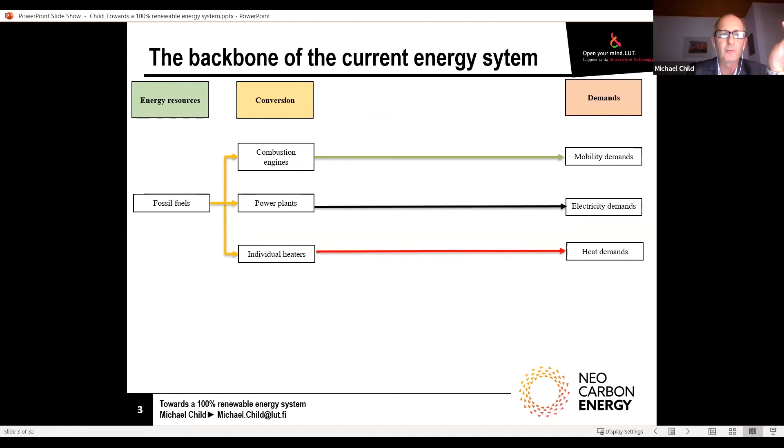So let's make that first change in our system. We can use biomass-based fuels for all of these things, and we don't need to really change the system very much, because biomass can be converted to liquid fuels to replace oil, solid fuels to replace coal, and gaseous fuels that can replace natural gas. In many of these cases, conversion technologies like power plants and cars don't need to be changed at all.

However, there are two main problems associated with the extensive use of biomass. The first is that we can't store biomass the same way that we can store fossil fuels. We can't really store them for long periods of time without them either getting rotten or becoming lower in quality. And second, and I think this is the most important thing, there's simply not enough biomass in the world that can be used sustainably to cover all of our energy demand. We'll see a little picture of that a little bit later.

So we definitely have to look at some of these other options so that we can reduce the pressure on biomass. But what are all of these other options? This is what I hope to do, to go through them step by step.

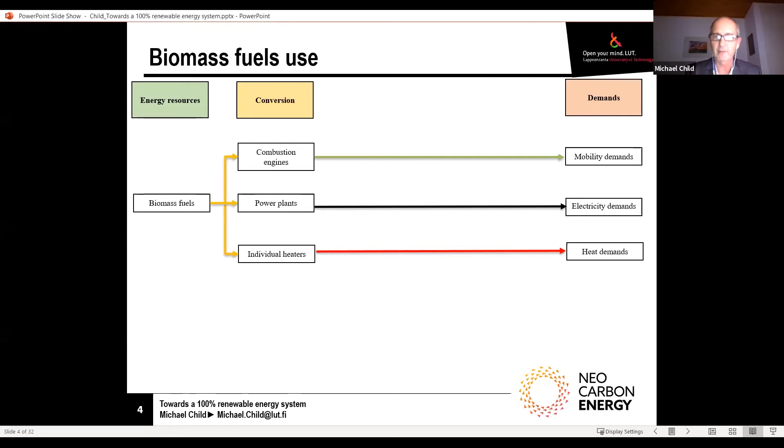So I think the first option that we need to look at is not the energy resources or the conversion technologies, but the demands for energy that we have. We need to change how we demand energy services. We need to reduce the amount of energy we use. We need to be more efficient with our demands. And important in the future, and very important to your lives, will be to add more flexibility of our demands.

So now I'm going to ask you another series of questions that I hope you'll answer. What are some of the ways, first of all, that we can reduce the amount of energy that we use, either for mobility or transport, for our electricity demands or our heat demands? How can we reduce the amount of energy we use?

AV, can you just open your microphone and say your name? Sorry, AV? She's my sister, Assunta Viola. Assunta, my name is Assunta Viola.

Okay, Assunta, so what you said on the chat box? I said using natural resources like sunlight.

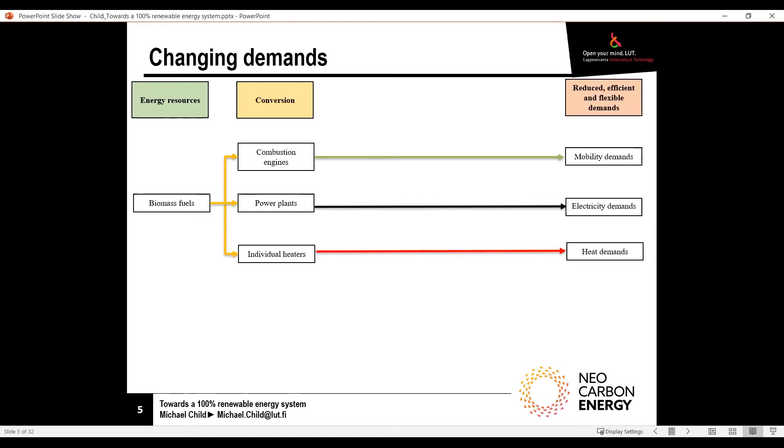This is key: we start to realize that more of our energy intensive activities can be timed in a smart way. We do this for a lot of activities in our lives — we choose clothing appropriate for the conditions outside, we choose to do certain activities or not because of the weather. We're just going to expand that into many more energy-using activities, doing certain activities when the sun is shining, the wind is blowing, or it's raining, so we know there's hydroelectricity around, and then we can avoid or put off other activities for other times.

We've gotten very used to getting what we want when we want it in terms of energy services. But I think as we move towards more variable renewable energy, like from the sun and wind, we need to think about how our demands can be more flexible. I don't think that really gets enough attention — we focus more on energy resources, but I think this will be a very big topic for the future.

All right, so now let's look at some conversion technologies, specifically power plants and individual heaters. Power plants are generally what are called condensing power plants. They make electricity: we put a fuel in, we make hot water, it's turned to steam, and that steam drives a turbine that makes electricity. But what happens to that steam after it goes through the turbine? For the most part, it just gets condensed or cooled in a cooling tower and goes off harmlessly to the atmosphere. The energy efficiency of condensing power plants is roughly 30 to 38%.

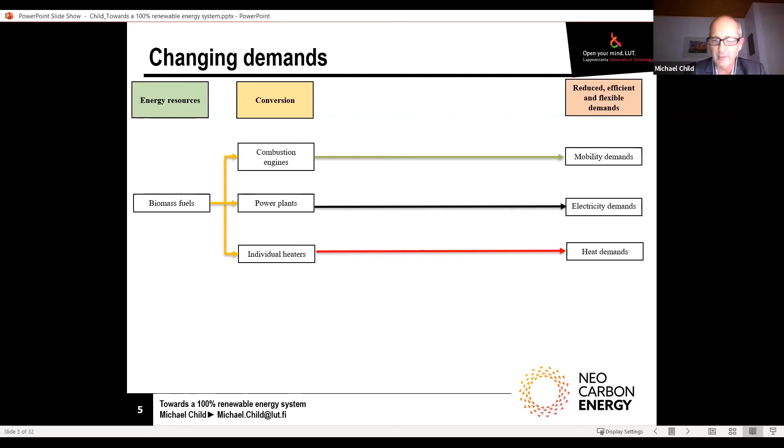But here in the Nordic countries, we utilize something called combined heat and power plants. We make electricity at roughly 40% efficiency because of the type of plant that we use, and at the same time we make heat. We utilize this heat in district heating systems that heat our homes, businesses, shopping malls, hospitals and so on at about 50% efficiency. So the combined energy efficiency of a combined heat and power plant is about 90%, far more than just the individual plants we had before.

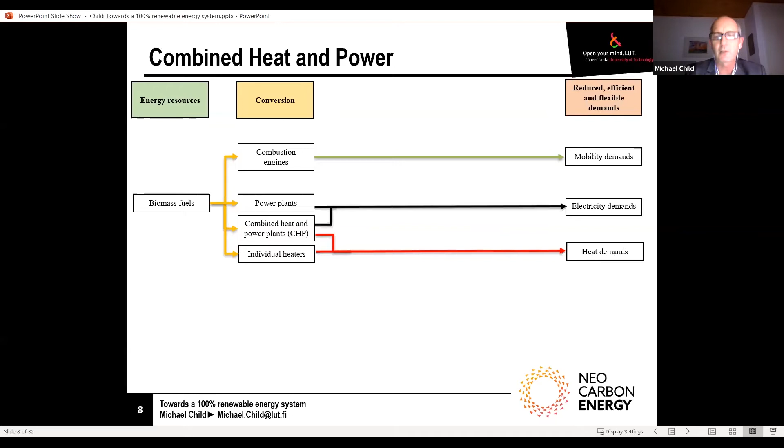And this will ease some of the pressure that we have on the biomass resource. Another good thing about district heating systems is that we can utilize a whole bunch of different types of heat. One thing district heating systems commonly have is some kind of storage, and this type of storage tends to be very cheap. We can make significant amounts of storage in caves, underground pits, tanks, and so on, and again it adds some aspect of flexibility.

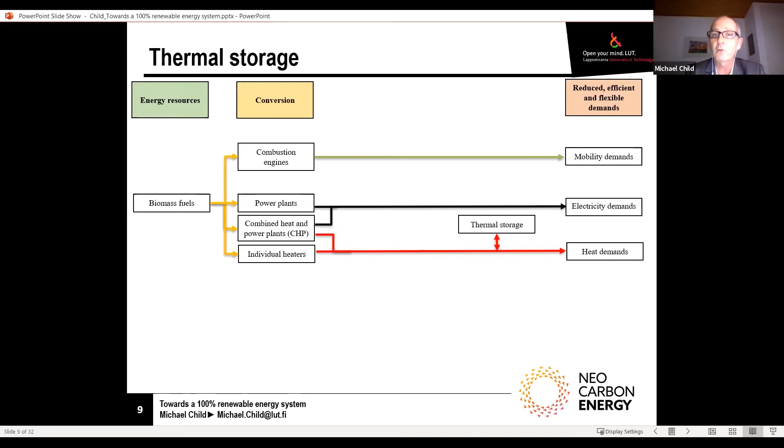We can even be flexible over a longer term, such as a seasonal scale. So we can make heat in the summertime when it's hot, and even save it until the wintertime when the temperatures are colder. Then we can look at other forms of heat that would fit naturally into a district heating network. This includes solar heat that we've already talked about - it can be used in a district heating network, or in an individual home for hot water - but also waste heat from a number of industries that use steam or hot water in their processes. This waste heat can easily be recovered and used in the district heating system.

All right, so we have a new element here to the system, but we need to add more. I asked you earlier about what other types of energy resources we have access to, and I'll just show you a simple graphic of what they all are.

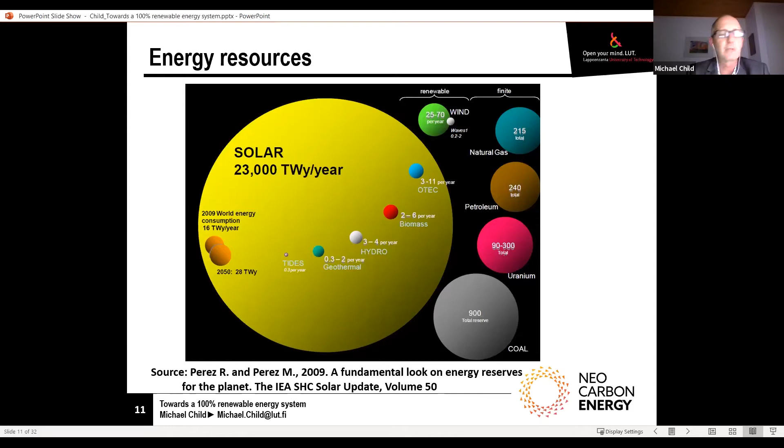As you can see, the total use of biomass as a resource is less than half of the current demand for energy, and it's expected to only be about 20% of total energy consumption in the world in 2050 at best. So we need to go back and look at other energy resources that we can use so that we don't cut all of our forests down and only use biomass sustainably.

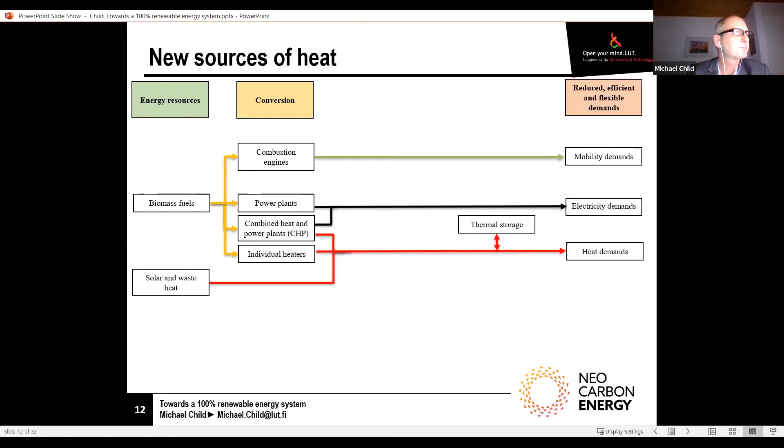So we need to use a wider range of sustainable and renewable fuels, and we've mentioned some of these already. You can add sugarcane to this, other crop residues - all of these are sort of biomass, but we can think of it a little bit differently. And we can also start to think about other sources of electricity, which have also been mentioned as well.

I've already mentioned that thermal storage can offer some kind of flexibility, even up to a seasonal time scale. And we have seen how combined heat and power plants and district heating can bring together the electricity and heat sectors. In the traditional energy system, these sectors—mobility, electricity, and heat—tend to be looked at in isolation, but now we can look at them in an integrated way. Further integration can come from heat pumps.

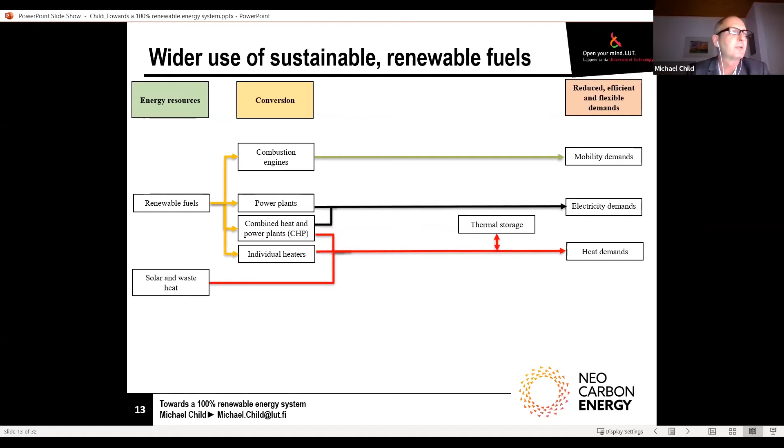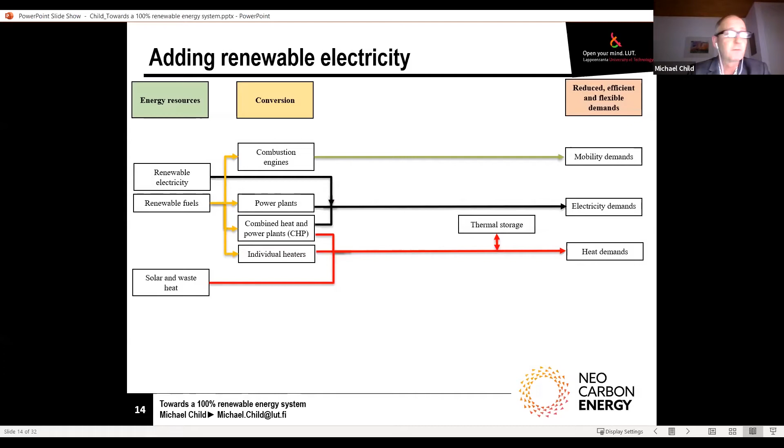Instead of using just individual heaters, we can start to use heat pumps and other sources of waste heat, such as geothermal heat, solar heat, and waste heat already. In my own home, I have a geothermal heat pump that basically converts 1 unit of electricity into up to 5 or 6 units of heat, depending on the outside temperature. This is another way I've been able to be much more efficient in my demands for energy. I still get the same amount of heat, but the overall primary energy I'm using is much lower.

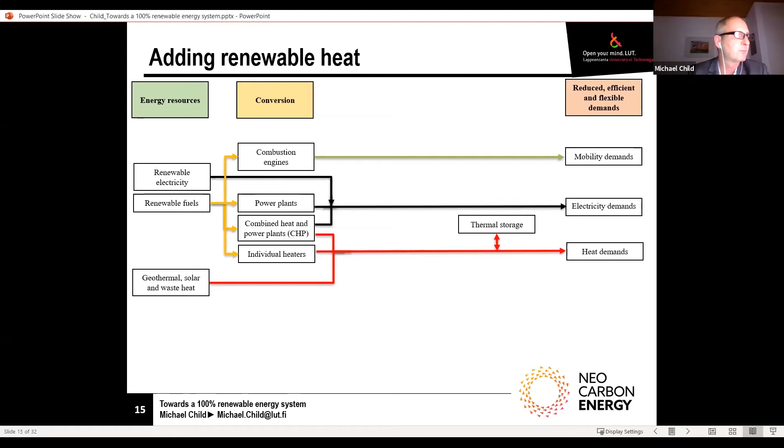As mentioned, we can also get power and energy storage from hydropower or hydroelectric power plants. The amount of storage depends on the type of river or water system where we find the hydropower plant. Some of the rivers here in Finland, for example, are quite small, so the amount of storage behind the dam is very limited. But I'm sure in Brazil there are much larger hydroelectric projects that can offer much more flexibility to the energy system.

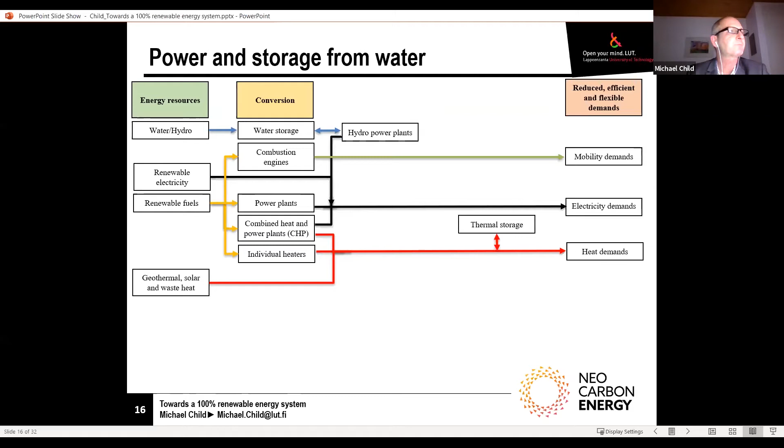What happens when the sun doesn't shine, the wind doesn't blow, and we don't get enough power from hydro, and our renewable resources or renewable fuels such as biomass are used to their maximum? Well, luckily, we can borrow from our neighbors if they have any. And at times when we have extra energy, perhaps we can sell that to our neighbors as well. So wisely using import and export is yet another aspect of flexibility that we already use in our energy system, and we can use even more in the future.

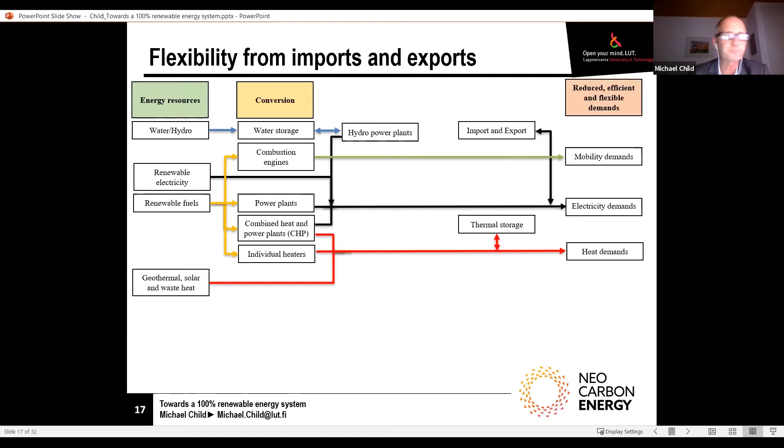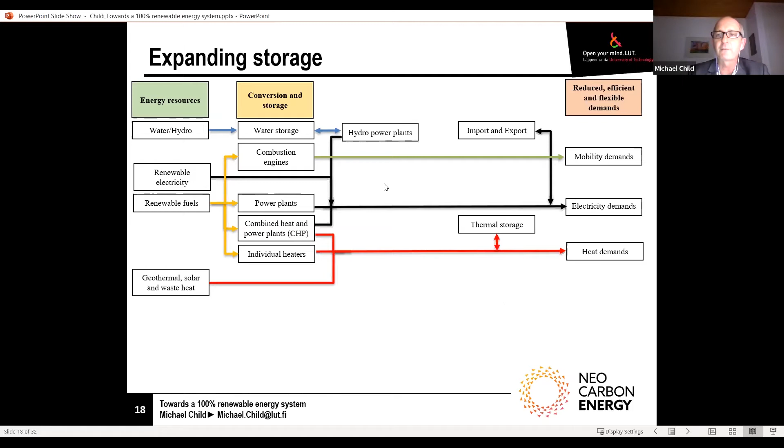We can also expand different types of storage as well. One thing we now can start to see is that when we have an excess of renewable electricity, or when we have excess renewable fuels and so on, we have access to storage and other aspects of flexibility that will help us in the future.

So here's another form of energy sector integration. When we have, for example, excess renewable electricity from the sun or wind, we can use that in a heat pump to create heat, or use it in a direct electric heater, which a lot of people have in their homes as well. So we're going from power or electricity to heat. And by having heat pumps and electric heaters in the district heating system, we have access to this very large potential thermal storage in the system. Again, that can be used on a seasonal level, so we can actually take the sunshine from the summertime and turn it into heat for the wintertime.

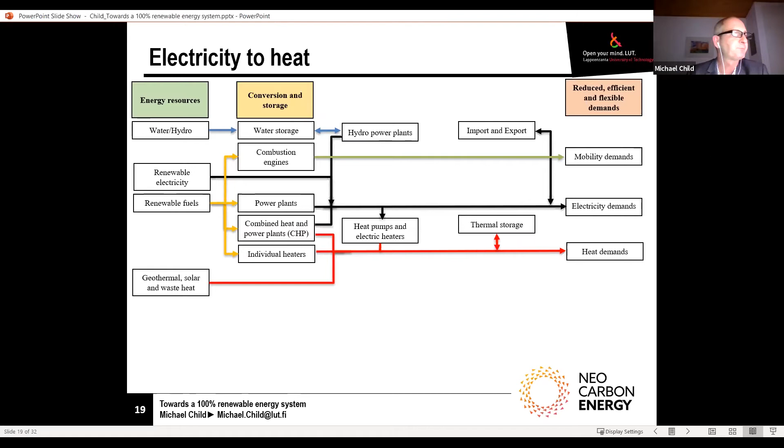So now we have an improved energy system at least, and we're taking a lot of the pressure off of our biomass resources by adding some other resources. We're being a little bit more efficient and flexible with conversion and storage, and also with our demands. But we still have a lot of work to do, and in particular, we haven't really talked yet at all about the transport sector.

Our demands for mobility have traditionally been supplied by oil-based products, particularly gasoline, diesel, and kerosene. Certainly other fuels have been used, but these fossil fuels represent the vast majority. I know that in Brazil, biofuels and biofuel blends and so on are very common, and I think the world is learning a lot from Brazil about how to use bio-based fuels.

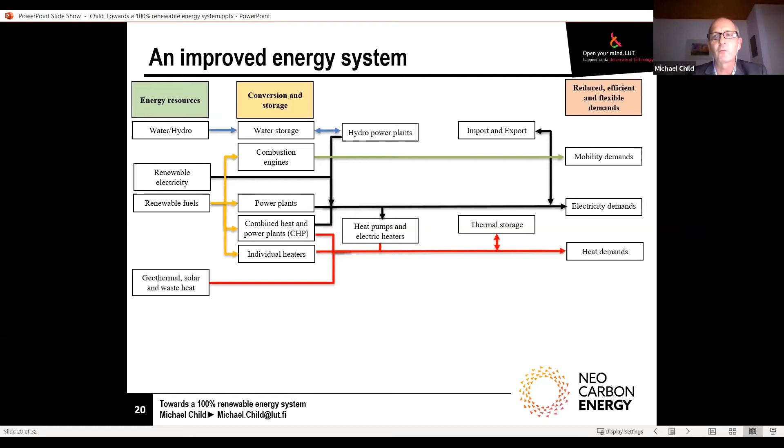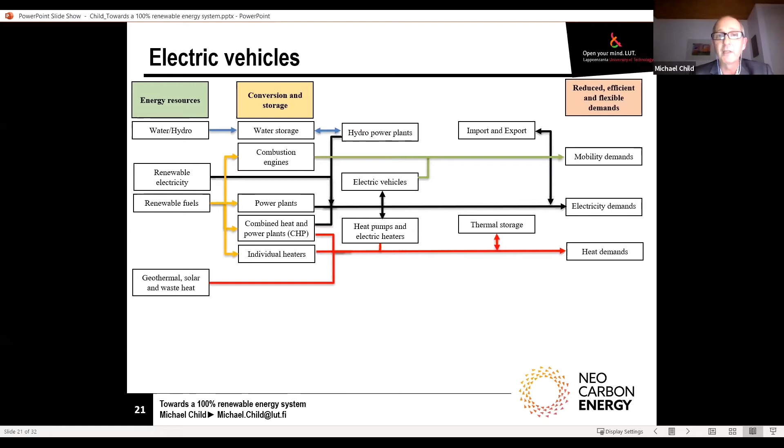But an important aspect of mobility in the future, I'm sure you're aware of, will be electric cars. Electric vehicles are more than 3 times more fuel efficient than vehicles that use combustion engines, and this again results in decreased pressure on energy resources. What's more, the batteries of electric vehicles offer a significant storage opportunity for the energy system, or increased flexibility in the system. So when we look at the average size of a battery of an electric car, mine is 40 kilowatt hours.

What does that mean? Well, that represents about 5 days of electricity that I would use in my house on average. Okay, maybe it's only 1 or 2 days of wintertime consumption of electricity, but the point is that it's a very large amount of electricity.

These batteries are very big. And now we have direct access from renewable electricity to another form of storage. It's not going to be the only form of storage that we use, but it's another one that we can use to add flexibility to the system.

My own research is showing me that if we smartly charge our cars at times when electricity is available, and avoid charging our cars when the sun isn't shining and the wind isn't blowing, that can be very good for us as individuals because we can take advantage of lower prices in general. And it can also be very good for the system. Anytime we can be more flexible with our demands, the infrastructure that we need to support the energy system can be a little bit lower. If we continue to get what we want when we want it, we have to pay for more infrastructure. And we can avoid doing that.

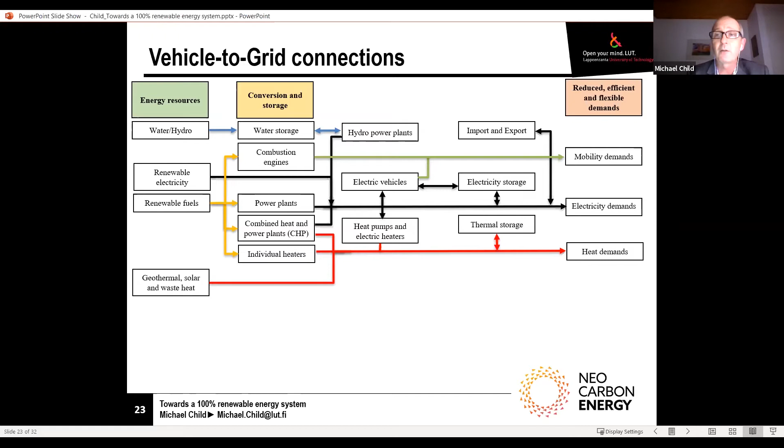The good thing is, we know already that we can make some of these fuels from biomass, but we can also produce them synthetically. This is something we're doing at LUT as well. We are making synthetic fuels from some basic building blocks: from air, which contains carbon dioxide; from water, which we can take hydrogen from; and from excess renewable electricity. With these three main building blocks, we can make any kind of hydrocarbon that you want, and certainly all of the hydrocarbons that we can use in automobiles and for other applications, as we'll see soon.

At the moment it is expensive to do that, but again the costs are coming down as we build up this technology. By the way, this is not at all new technology - the chemistry based on this synthetic fuel production is more than 100 years old, so we are very good at doing this. What we haven't been so good at is bringing the cost of this kind of production down. But once we do, and I believe we're heading in that direction very quickly, we can use these synthetic fuels exactly the same way we've been using traditional oil products in the past. We can store them for long periods of time in exactly the same kinds of storage facilities we are currently using, so there's a lot of aspects of the energy infrastructure already in place - we've already paid for them.

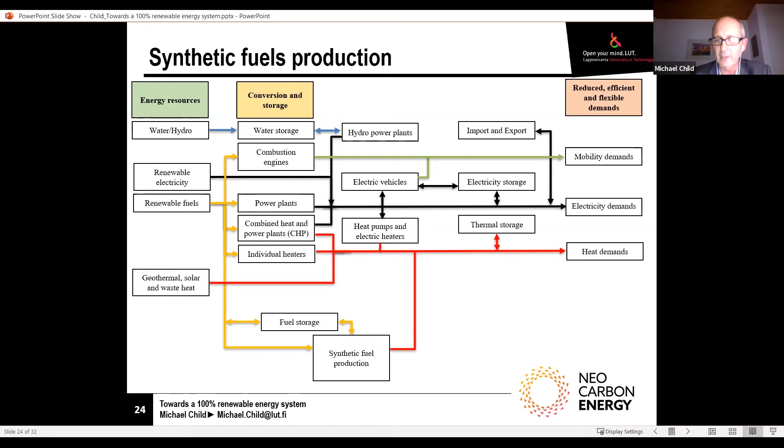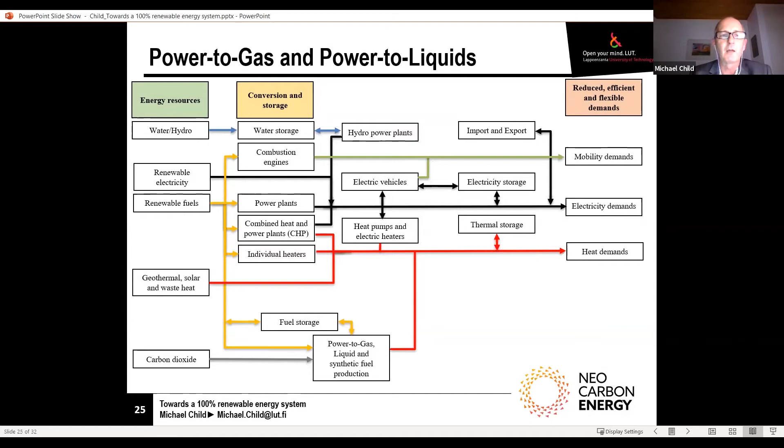In addition to making power, turning power into gas or power into liquid fuels, we can make a number of other types of products as side products. All we need is carbon dioxide, some water, and some renewable electricity, and then we can make a whole bunch of different products. Some of these can even satisfy some of our chemical demands - we can make hydrocarbons used to make paint, waxes, and naphtha, which is used as a heating fuel, sometimes in aviation, and other chemical products we need in everyday life. We can use the nitrogen from the atmosphere and make ammonia, which can be the basic building block of a lot of fertilizers needed in agriculture. So this is another big concept at the university at this time: power to X. What is X? Well, X can be any product that we think we can make from these basic building blocks of renewable electricity, water, and air.

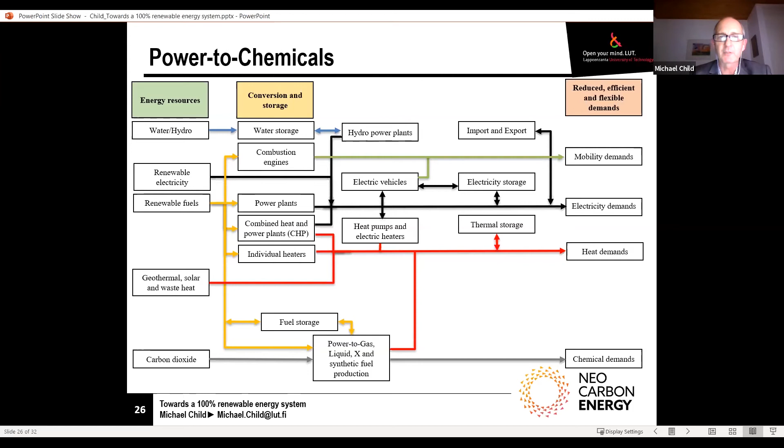What else can we do with this power? Well, we can make water to satisfy growing global demands for fresh water to drink and to use in our agricultural fields. We can take salt water from the oceans, which is rather plentiful, and with a little bit of electricity and sometimes heat, through a process called seawater reverse osmosis, we can turn salt water into fresh water suitable for drinking, cleaning, and agricultural purposes. So this desalination represents yet another flexible demand for electricity, and we can satisfy these water demands and store water at times when renewable electricity is plentiful. And that will happen a lot of the time - the sun likes to shine and the wind likes to blow, so we will have the opportunity to do this.

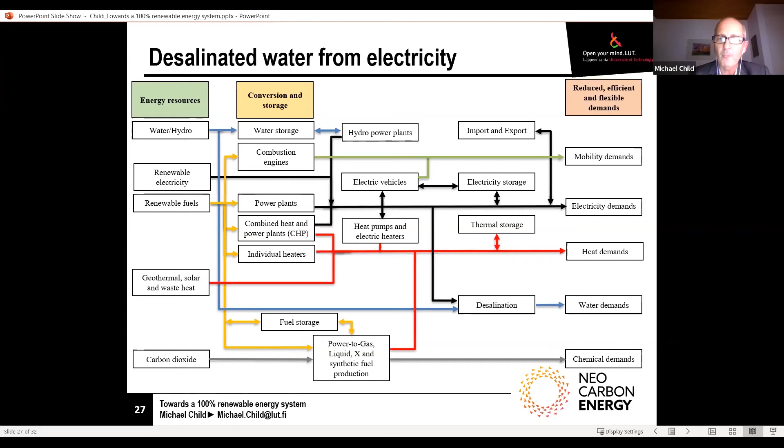One final element I want to talk about is electricity storage, because so far we've only really talked about vehicle batteries, but there are many other forms of electricity storage being used currently and that will be used in the future.

One of the most common forms of electricity storage now, and I'm pretty sure used in Brazil, is called pumped hydro storage. This is often associated with hydroelectric dams, where excess electricity can be used to pump water back up to the upper reservoirs, and then the energy can be used at another time. However, a number of dedicated pumped hydro storage systems exist in places where water reservoirs can be located at high elevations, and that's not always possible everywhere. In other places, we can make smaller pumped hydro storage systems using caves or abandoned mines.

There are lots of other possibilities for vehicle batteries and stationary batteries in our homes, for something called compressed air energy storage, where you drill a hole into the rock in the ground, pump air there under very high pressure using electricity, and then release that pressure through a turbine and make electricity when you need it.

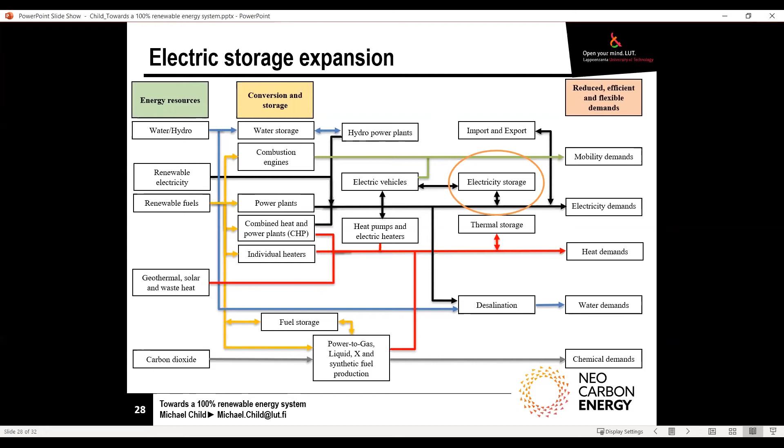Yeah, but I think it's not that useful, as you were saying, with new research coming in electricity storage. But that was my question, if it's still being used, and it makes all the sense when you light a cigarette or a barbecue, it's the same thing. Yeah, it's very interesting.

There are other ways we're kind of using electricity to produce mechanical potential energy that will then again become electricity. We can take large concrete blocks, and when we have excess electricity, lift them very high in the air, then when we need electricity, drop them down again, using a turbine to do all of this, just in two directions. There's all sorts of things out there, and the race is on to find new forms of electricity storage. It's a very vibrant research area full of possibilities for the future.

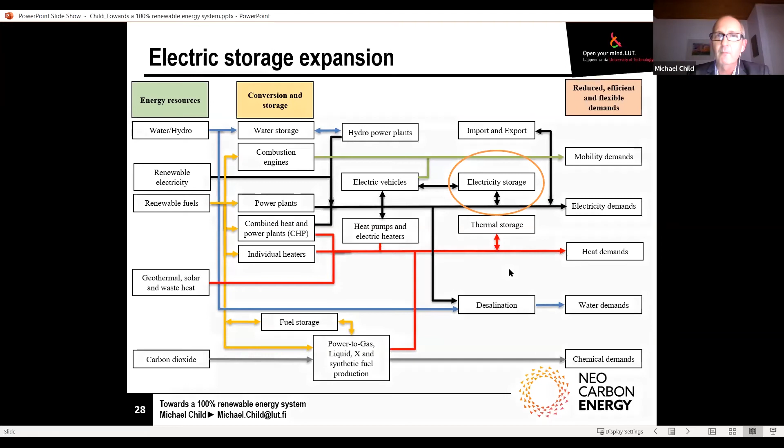Nice. All right, so there we have it, a 100% renewable energy system. Several research studies I've been involved with suggest the overall cost of such a system may even be less expensive than the current system. Other studies suggest it'll be roughly the same cost, and still others suggest the costs will not be significantly more than the current energy system.

So I think that we can also look beyond the costs and think of all the other benefits that we get from this type of system. From a social perspective, this could mean a great deal of domestic job creation, because we won't need to buy oil from a small number of countries that have oil and other energy resources. And this could create a more equal and just world

that has a lot less political tension. One of the preliminary activities I sent asked you to consider a simple question: what is the likelihood that nations will go to war over solar energy? Compare that to the likelihood that nations will go to war over oil. I think we all know the answer. That too has a cost, or represents a benefit that we can, if we want, even put a dollar value on.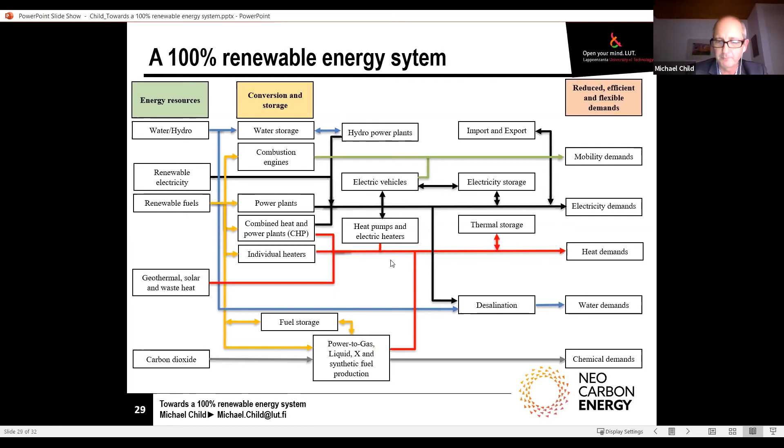The future is full of possibilities, and one of the most human of qualities is our ability to be adaptive and creative in the face of change, especially threatening change like climate change. My personal view is that 100% renewable energy systems can be a very important part of our strategy for the future. So I'd like to thank you very much for your attention and invite any questions you might have.

Michael, I know loads of renewable fuels and energy are already being used, but when do you think society is going to use 100%, or at least use more renewable energy, for everything?

I think that if you're looking for a date as an answer, the date will be different in different parts of the world. I think countries like Brazil that have an abundance of natural resources have at least the opportunity to reach 100% renewable sooner than other countries. But there are other issues in countries like Brazil that are also very important. Getting energy services to everyone who needs them fairly and in an economical way is a big challenge, shared by many countries.

When you look at countries like Norway and others in Scandinavia, I think it can happen there much earlier. They're already looking at 2035 to 2045, in different parts of their energy system, for becoming 100% renewable. Europe will definitely get there, or close to it, faster than North America. So, it's a complicated answer, but in theory at least, my research is showing, and not just mine but others', that it can be done by roughly 2050. And I think this is consistent with the goal to limit global warming to well below 2 degrees Celsius.

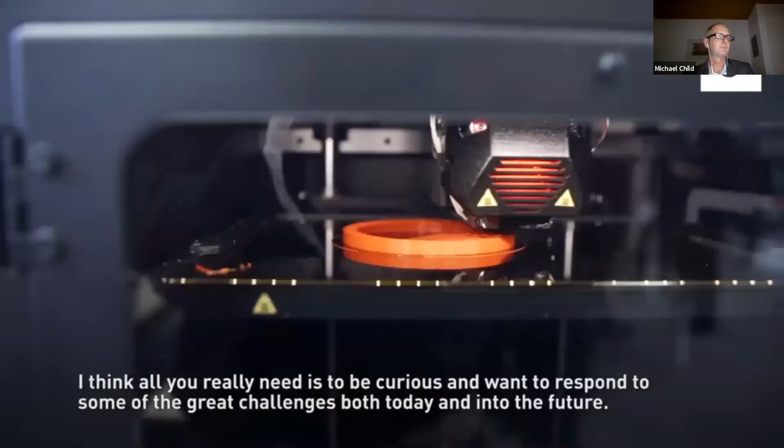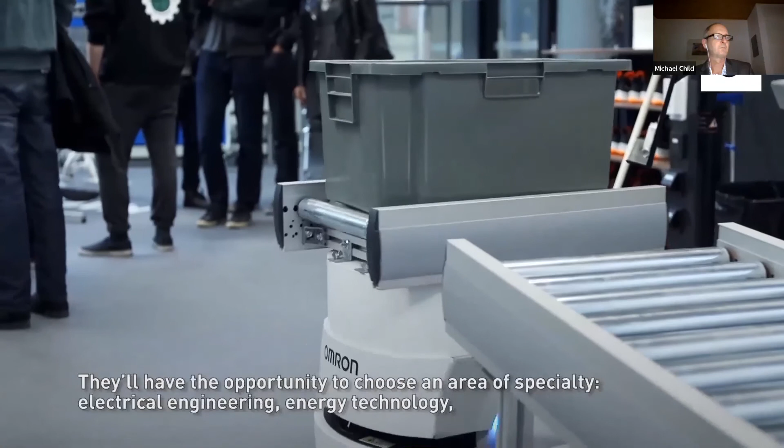Who is this program for? I think it's really for anyone who is interested in the engineering sciences. All you really need is to be curious and want to respond to some of the great challenges both today and into the future. The students in the Technology and Engineering Science program will receive a broad foundation of both knowledge and hands-on skills. They'll have the opportunity to choose an area of specialty.

It's electrical engineering, energy technology, mechanical engineering, and environmental technology. Students will also learn to manage complex projects, to work as part of multicultural teams, and develop the entrepreneurial skills that are needed.

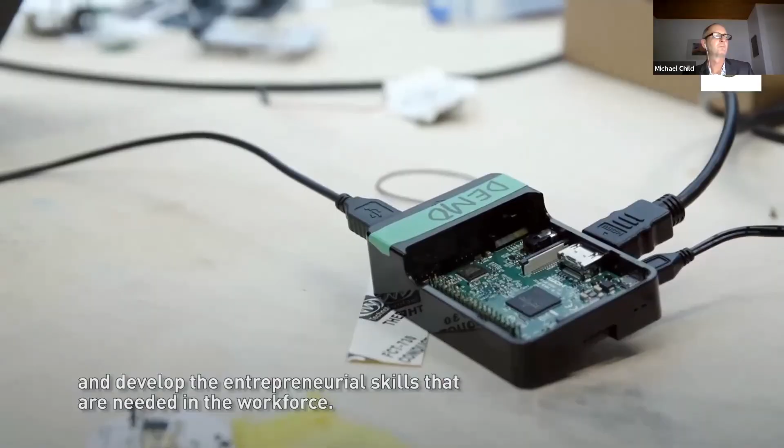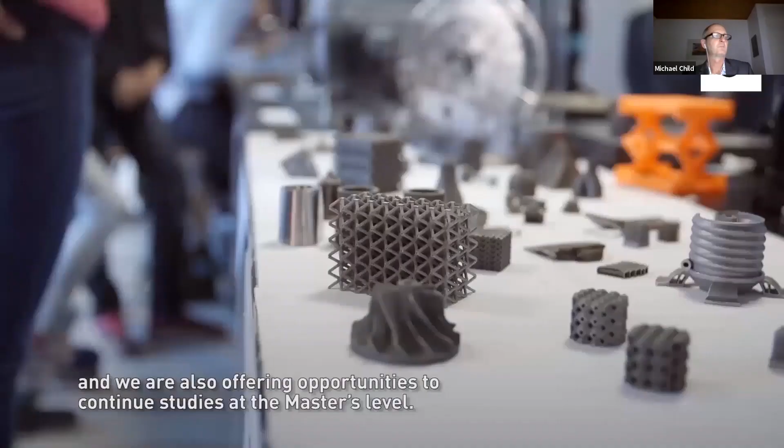Throughout all of this, we aim to involve the many high-tech, clean-tech companies that are right here around us. We're also offering opportunities to continue studies at the master's level. For too many students who leave university, there's this question afterwards: what am I going to do now? I see a different story playing out for our students. I see them at the end of their studies saying, guess what I'm going to do next?